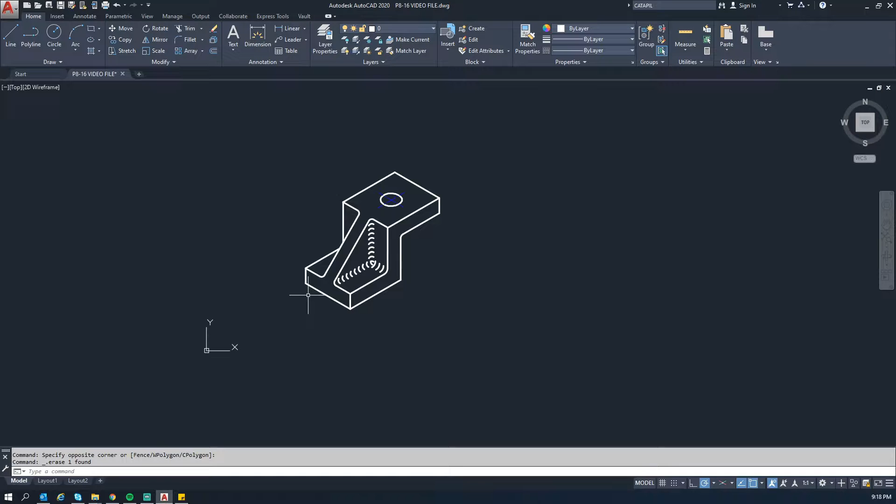So we know the width of this from the book is going to be 44 inches, and we know the height of that is going to be 13. So this shape here is basically what you were going to be seeing here.

Now we need to get the total height of this from the base up to the top. We know that height is going to be 38 plus 13, which is the thickness of this top piece. So we'll go up 38, then up 13, then over the 44, and back down.

The next step is this little ribbed feature here, or what they call a gusset. We know the center line of our part is right here. The width of this is going to be 10 inches, so we know it's going to be 5 inches on either side of this center line.

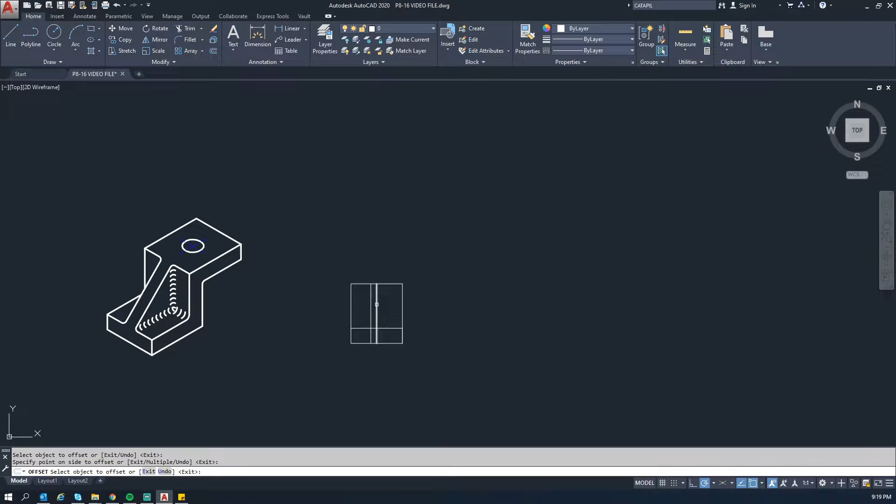So we're going to use the offset command with an offset of 5, then we'll click and click. Same thing to go the other way, and then we'll delete that.

If you notice, these lines down here don't necessarily need to be there, so we can use the trim command, hit spacebar twice, and knock those out, as well as this inside part here. And that's pretty much the overall shape for this thing.

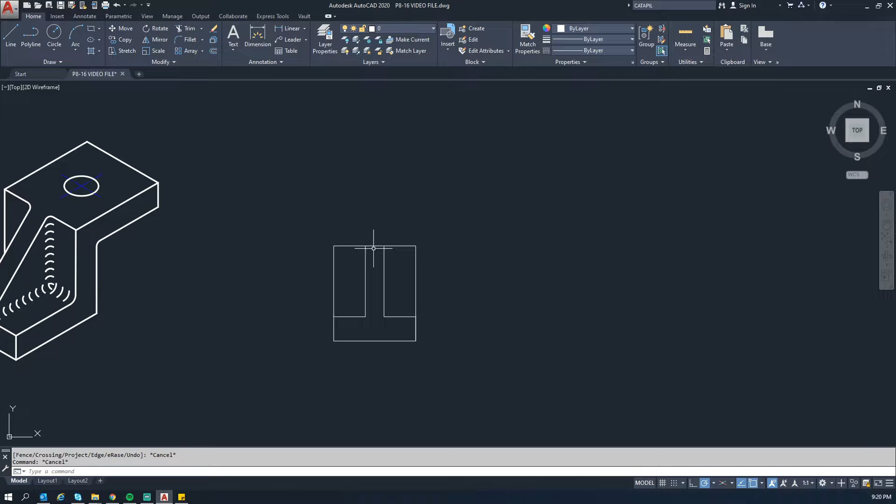What we need to do next is add in these fillets, which are these right here, and those have a radius of 3. So we'll use the fillet command and set the radius to 3.

Let me double check a couple dimensions real quick just to make sure we got it right. Yeah, okay.

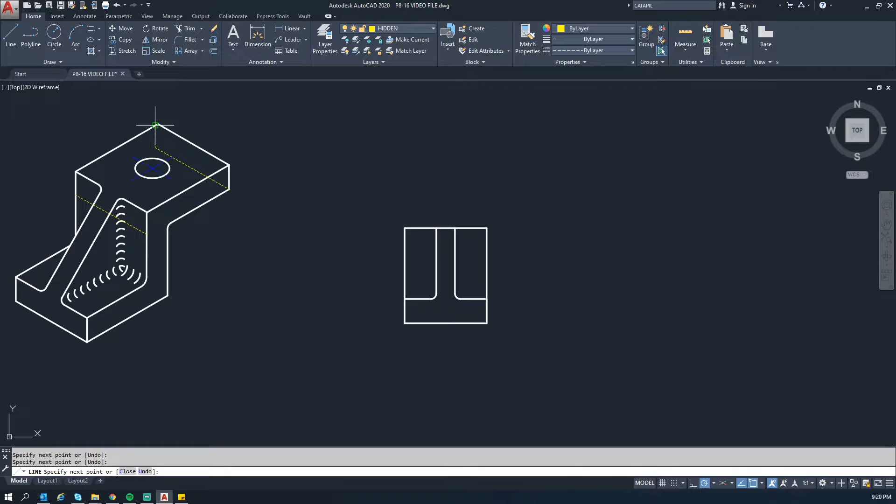So now we need to draw the different hidden lines, center lines, and things like that. We know there's going to be a hidden line for this feature here. You can imagine if you're looking at it from this direction, there's going to be a hidden line across here representing this area right there.

So that's what we need to draw in. We know that the thickness of this from here to here is 13, so we're going to do the same thing over here, go down 13, and draw it all the way across.

I'm going to adjust the line type scale real quick. Can't figure out what the line type... there we go. And then we also need to draw this circle.

We know if we're looking at it from the top, the circle has a diameter of 15 inches. So if we imagine a circle being here, the diameter of 15, then we know that this is where the hidden lines need to be vertically, and it goes through this entire section here, so we'll draw it through the entire section here.

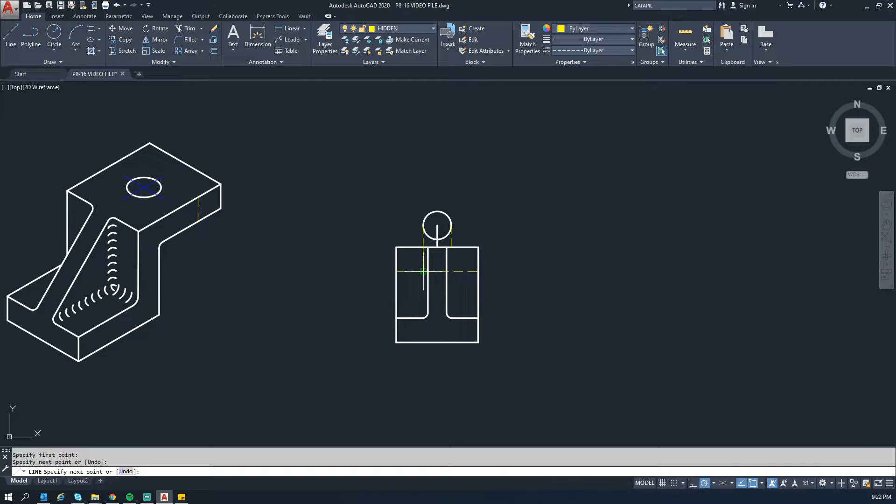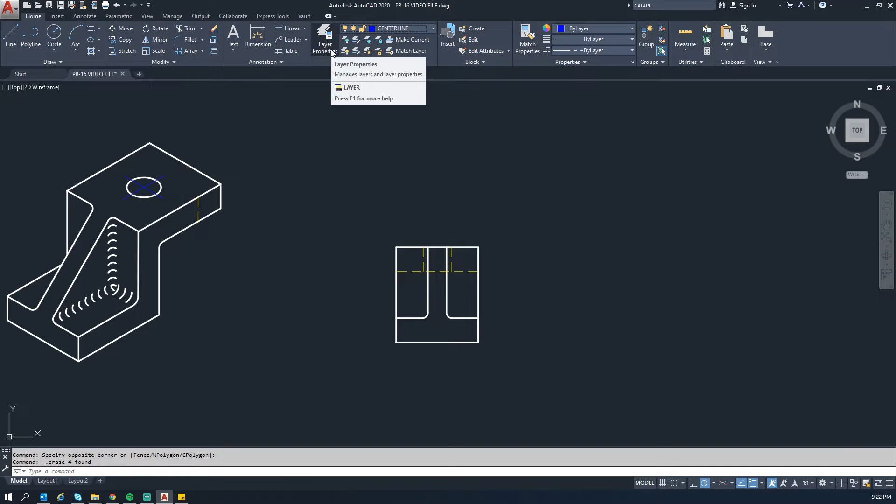Just like that. And we will need to add a center line to that, even though that circle or that hole is hidden, you still need to show the center line for it. So we'll select our layer with the center line on it, use the CL command, center line, and then click each side of the circle.

Make this look a little better. There we go.

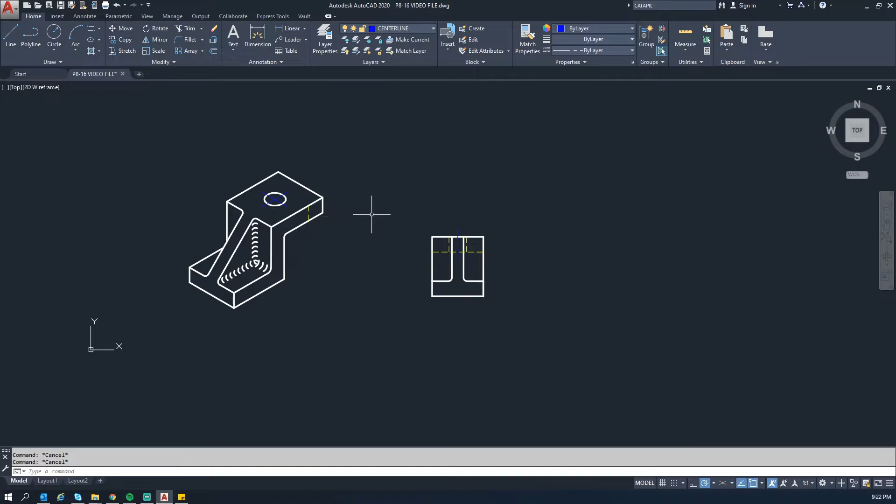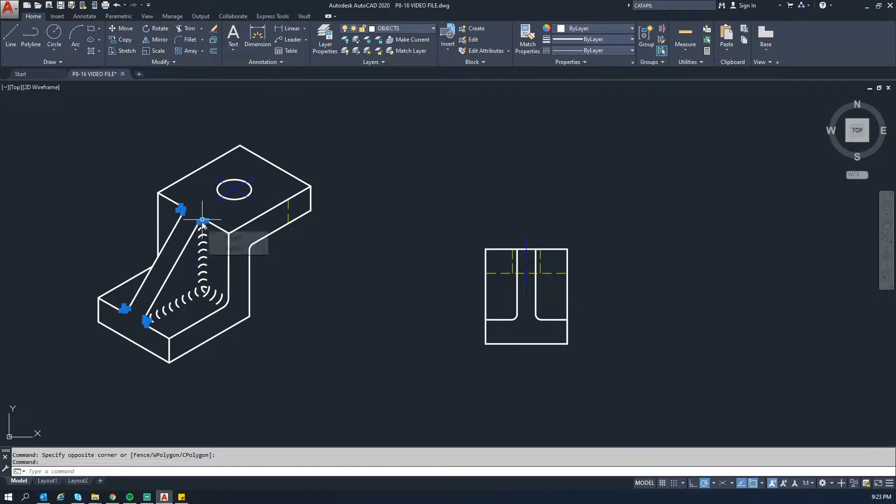Now, looking at it, we need to add these fillets up here with a radius of 3 again. If you notice in the book, when the leader points to this fillet, it has 4xR3, meaning a radius of 3 in 4 different places. Those are the 4 similar radiuses right here. We've already done the 2 on the bottom, so the next step is to do these 2 up on the top.

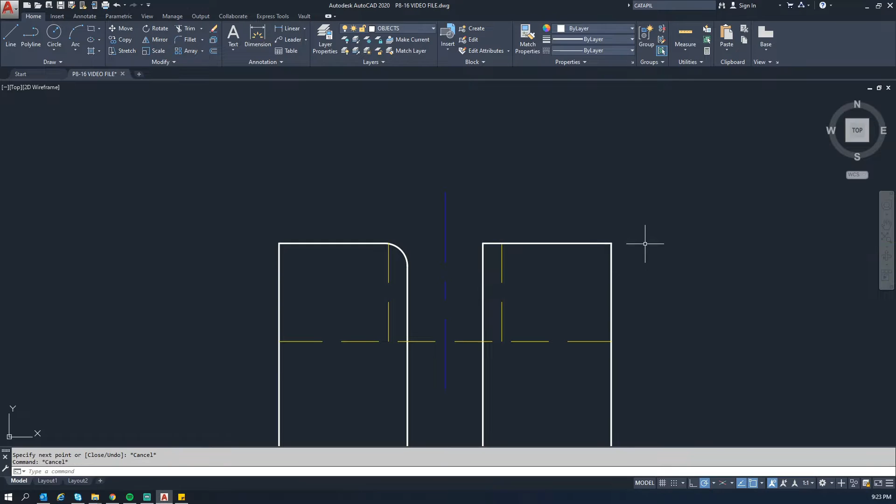We'll activate the fillet command with the radius of 3 and pop that one in. Unfortunately, it does make that line disappear, so you just redraw it, no big deal, and then extend the other one back over to meet it.

Taking another quick look, I think that's all for that view. So the next view we're going to work on is the top view, looking at this shape from the top.

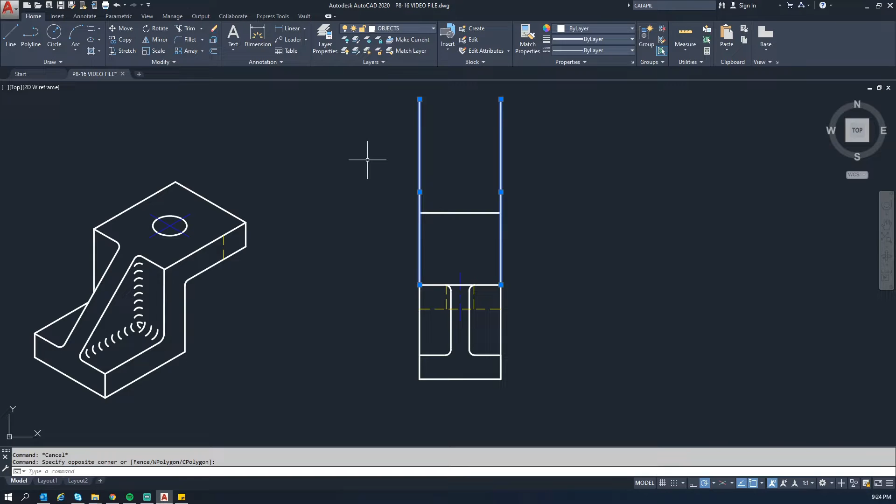We know the width of this entire piece is 44, so we can project off of this bottom if we want. There's a couple different ways you can do it, but there's your width. We know this whole piece from here to here is going to be 88 long, this dimension here. So looking at it from the top, that's how long this needs to be.

The next thing we're going to draw is the square feature up here. We know it is 44 inches across and 51 inches down, so 44 across and 51 down here. I'll go ahead and draw what I like to call my cheater line, 51 inches down, and there, and then there.

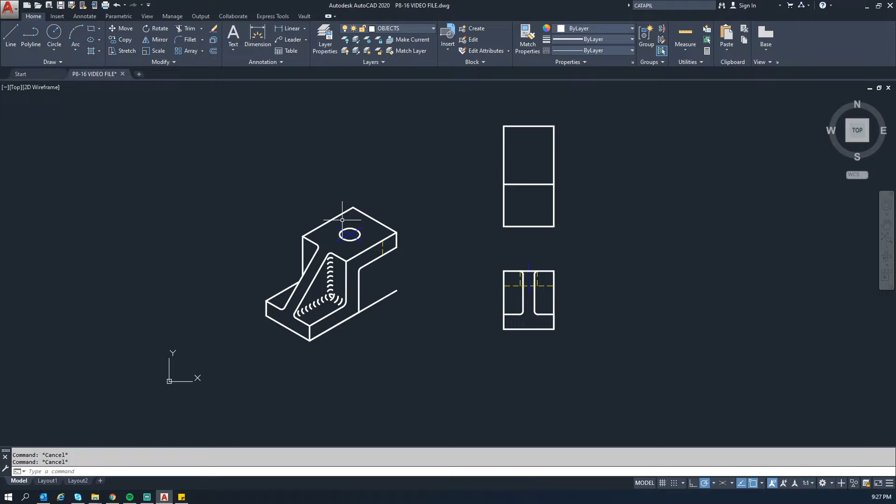I'm noticing that it doesn't look like this isometric view is a true representation as far as its shape in regards to the dimensions given. I've gone back and double checked everything, and these views are correct. This is just not a true representation of what the dimensions are. So when you look at this view from the top, it doesn't really look like it would look like this, but the math is right. Don't get confused by that.

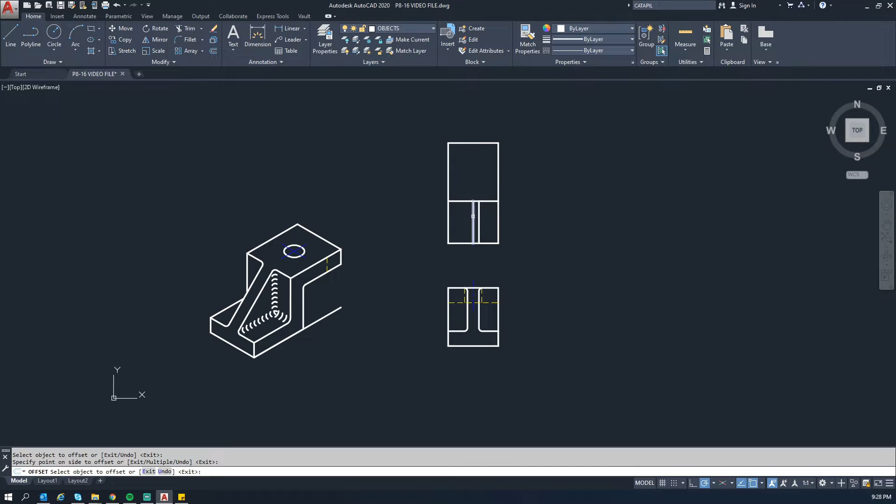Now that we have this drawn, we want to draw in this gusset. We know it goes from here to here, and it's 10 inches wide, so that's 5 inches on either side of this line. We'll do the offset command with a 5-inch offset, click the source and then click to the right, click the source again, click to the left, and delete the original line.

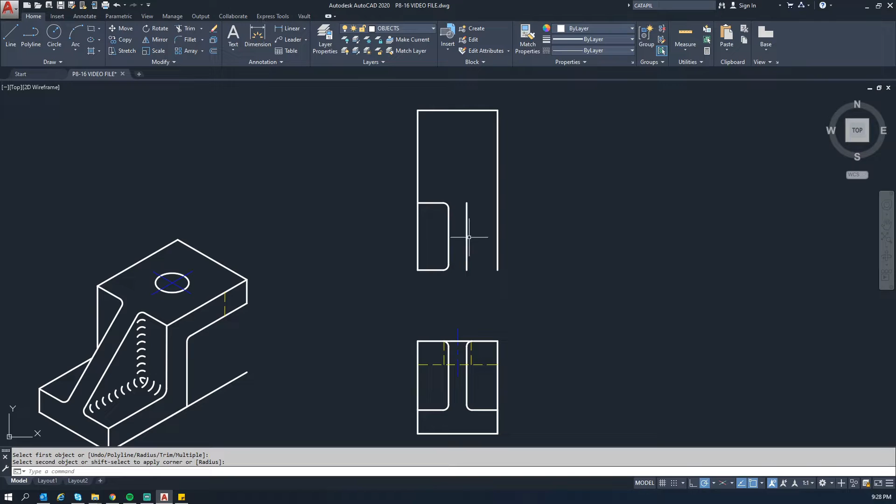We know the radius of these 4 fillets are going to be 3, so we'll reactivate the fillet command, tell it a radius of 3. It's going to do that weird thing where it erases the lines, but unfortunately that's just part of it - pain in the butt. Then we'll just redraw the line.

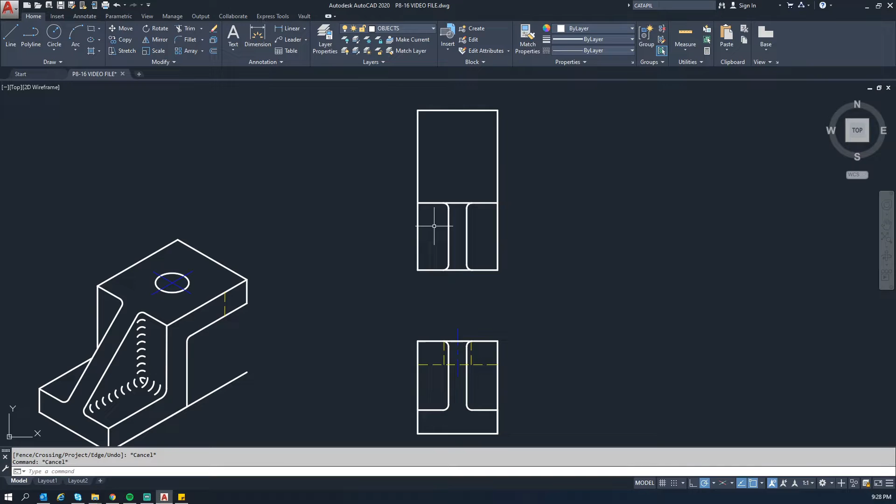I think all that's left now is drawing the circle in the middle. We know it's 22 inches down and 22 inches across, so it looks like it's going to be in the middle of that part. All we need to do is draw a line 22 inches down to mark the center point for the circle. Activate the circle command and click for the center point, then do a diameter measurement of 15. Once that's there, you can delete that line.

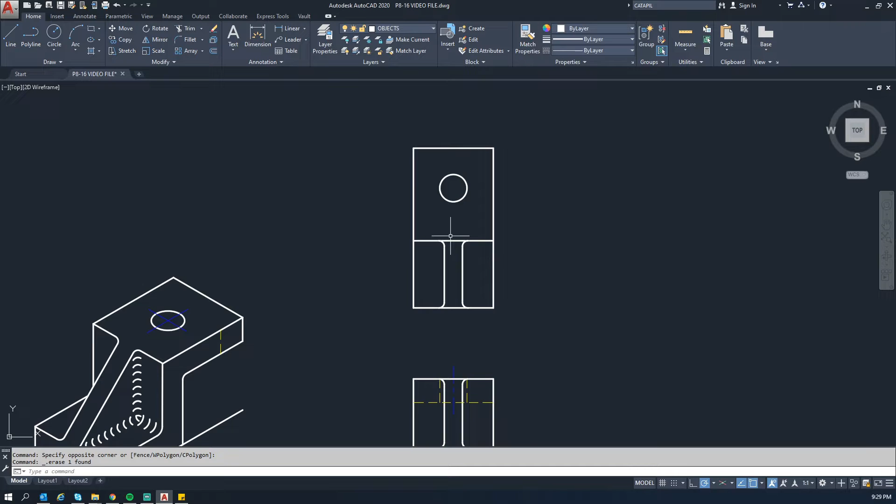It doesn't look like - yes, there will be a hidden line. We can see this line from looking from the top, but there's also one under here that we don't see, so that needs to be displayed using a hidden line. We know the thickness of this part here, here, and even down here is 13 inches - that thickness is consistent all the way through. So we can come up here, draw a line 13 inches up, and we know that's where it's going to go across there.

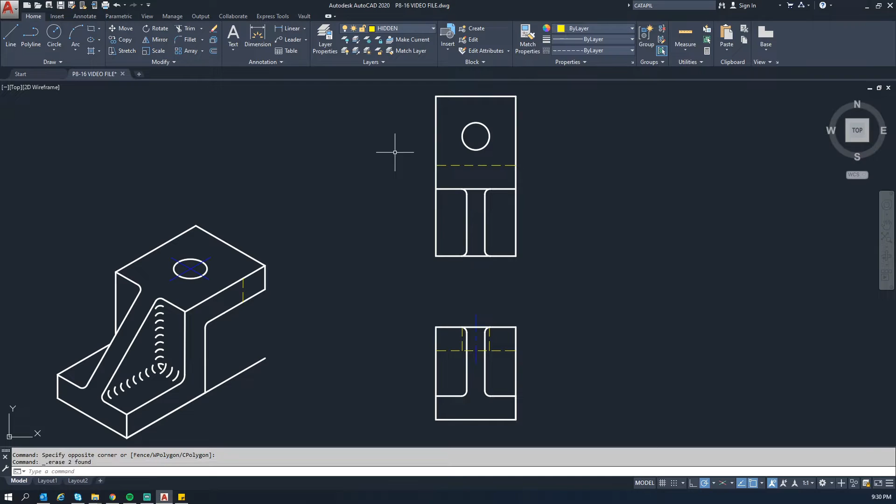And then from there, it looks like all we need to do is add the center line. So we'll activate our center line layer, hit CM for center mark, and click in the center. And that view is done.

So for the next view, we're going to be doing the right side view, looking at it from this direction. Just take a moment and imagine what you think it would look like before you draw it, especially now that we've already done two views together. If you want, pause the video and try to visualize what this would look like.

We're going to start off with just a couple quick reference lines that we'll delete later. We know that's how tall the entire part's going to be, it can't be any taller than this. And we know that this height here, from here to here, is 13. We'll try to pick about the same distance and go back and adjust that when we're done, because you want these distances to be the same between here and here and here and here. So we'll go up 13.

And we know the total length of the part is 88 inches long. So we can go ahead and draw this 88 inches, but keep in mind, this is 88 inches right here, but there's a section right here that's going to be missing, so just keep a mental note of that.

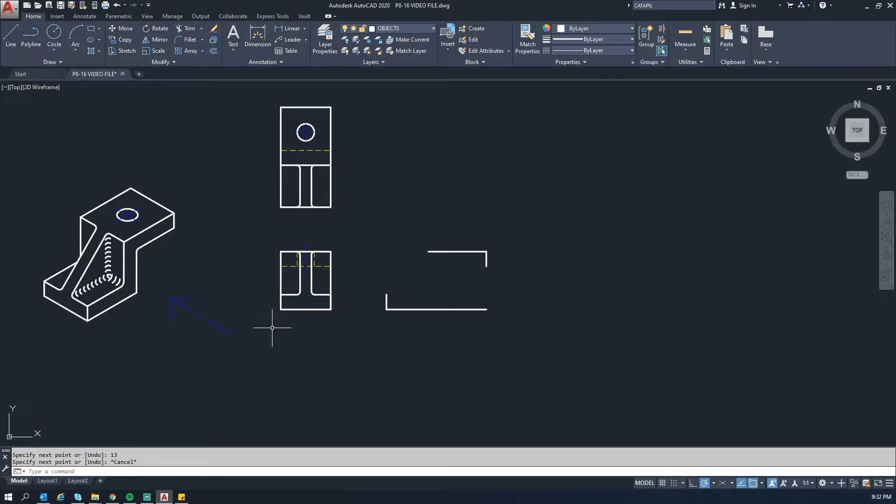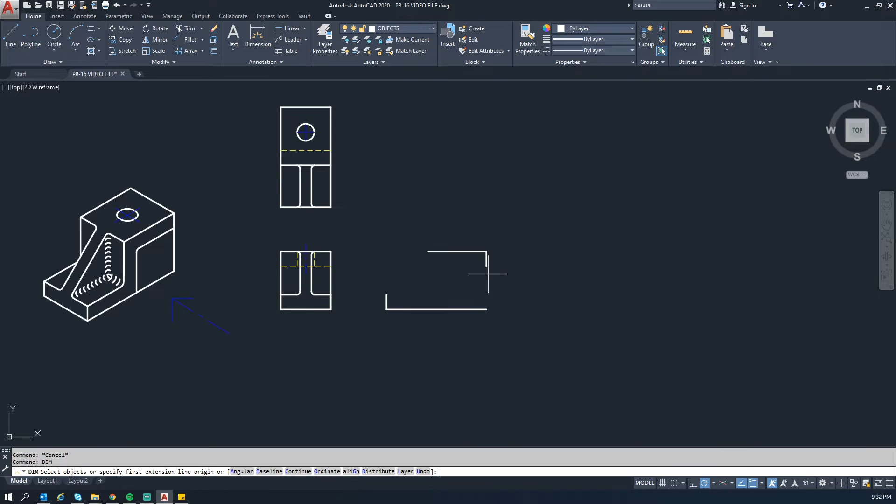And now it's just a matter of connecting what I call the zigzag. So we know this height, from here, this height right here in the book is 38 inches. If you use the dim tool, you can always double check. See right there, it's 38 inches, which is exactly what the book says. So we know we're doing all this right so far.

The next portion is, I'm going to draw a couple cheater lines again, going from here to here. But if you notice, that makes the intersection, and that's actually the shape of the part we want—that's this line and this line. So we can just use those. We can use the trim command, hit space twice, and trim that up.

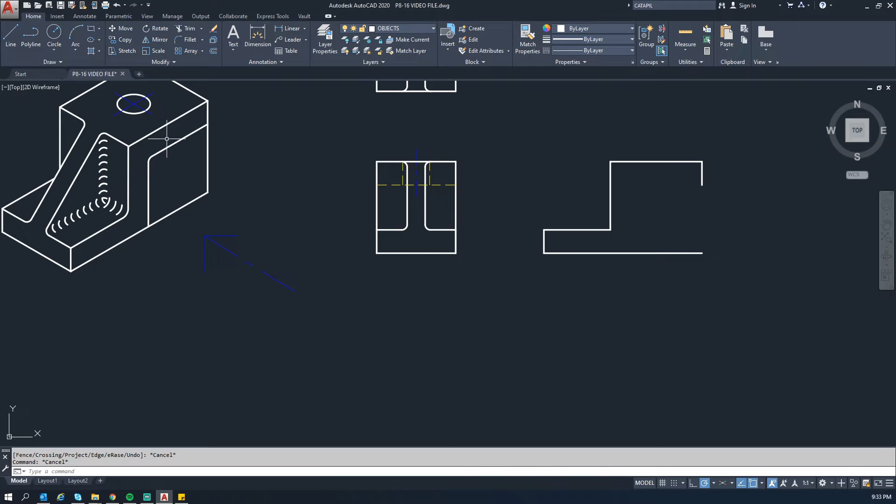So now we need to finish drawing this profile right here, which is going to be this right here. Remember, the thickness is consistent all the way through at 13. So we can draw a cheater line across here of 13, just draw it straight down, and then we know that's going to go to there. If you notice, these intersecting points here finish off the rest of the profile for you, and then that's your shape.

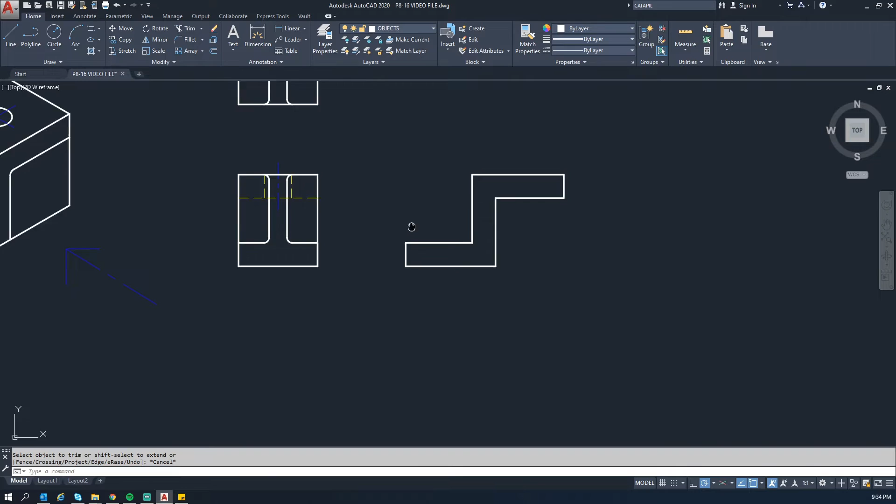So the only thing left to draw now is this gusset, which is actually really easy, because if you notice it goes from this point here to that point there. So that's it right there.

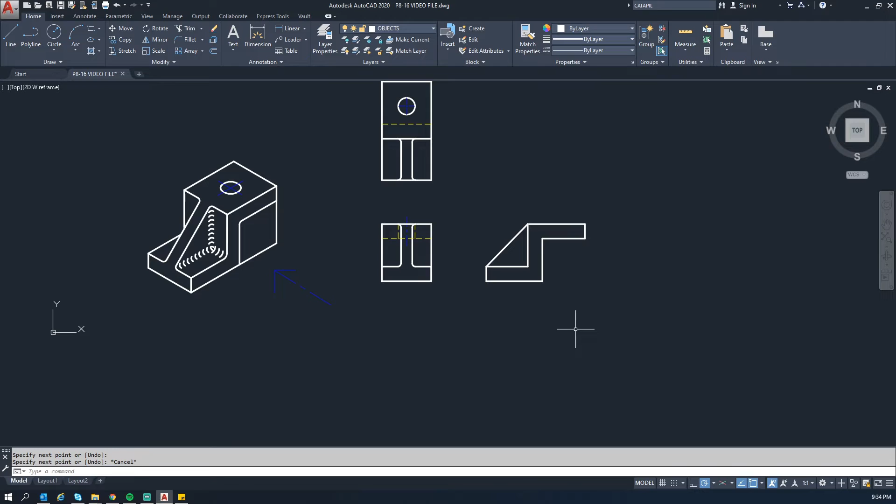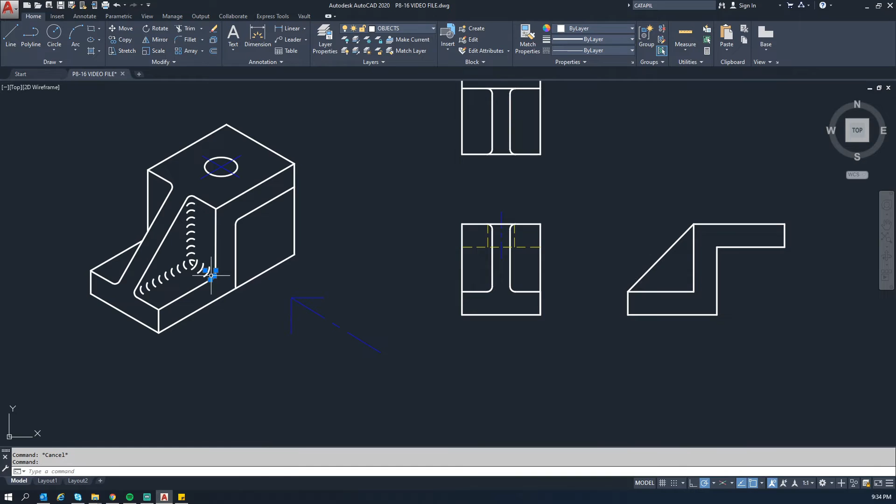With this view, you're not able to see these fillets that are here. You're looking at it from the right side, and because of the way the geometry is, when you look at the fillets from this side, there's no way to draw these fillets in. But the ones that are there are going to be this one and this one. And if you look at the book, it identifies this one right here as a fillet with a radius of—correction—that one is 4 and this one is 6. So we're going to use the fillet command with a radius of 4 and do that one, and then do another fillet with a radius of 6 and do that one.

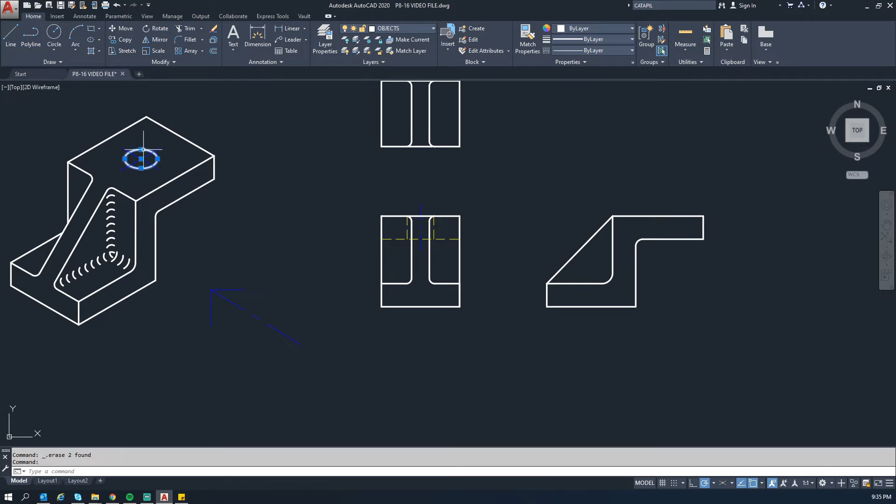That's all of the visible lines that are there. The only thing left is going to be the hidden line for the only feature that's not visible, which is this circle.

So again, in the book, we know that circle is 22 inches from that direction and 22 inches from that direction. So if you imagine this is the right side view, we're looking at the top view from the right. So we know it's 22 inches from this back edge. Well, this is our back edge right here.

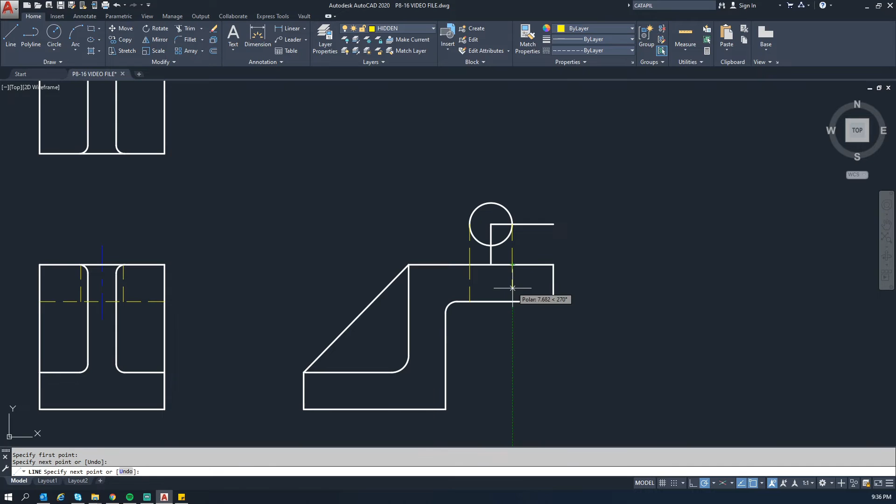So we can draw a cheater line, 22 inches and down, and that's going to be the center point of where the circle is. So we can do the circle, the dimensions are 15, so we'll do a diameter of 15. Then we'll get our hidden line layer. And boom, that's the circle. Then we'll select our center line layer.

Then we'll use the CL command for center line, and then we'll click each side of the circle. We'll extend these out just a little bit to make them look better.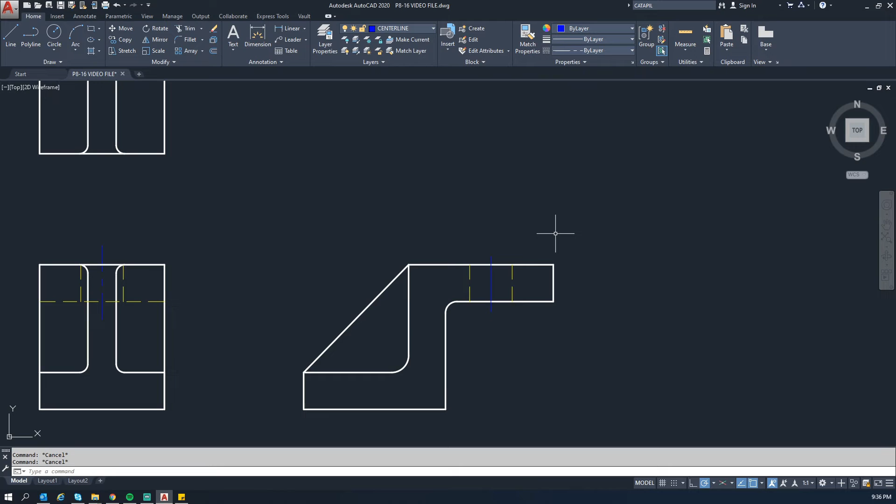But it'll probably be a little different for you guys, so you just need to play with the line scale, the line type scale, and things like that, and you can get it looking good. So let's see if we can get this one cleaned up a little bit.

We use the properties command after we highlight it. You can see here, these are all your extensions for your extension lines beyond the circle. So right now they're set at 0.12. So let's go to 0.3.

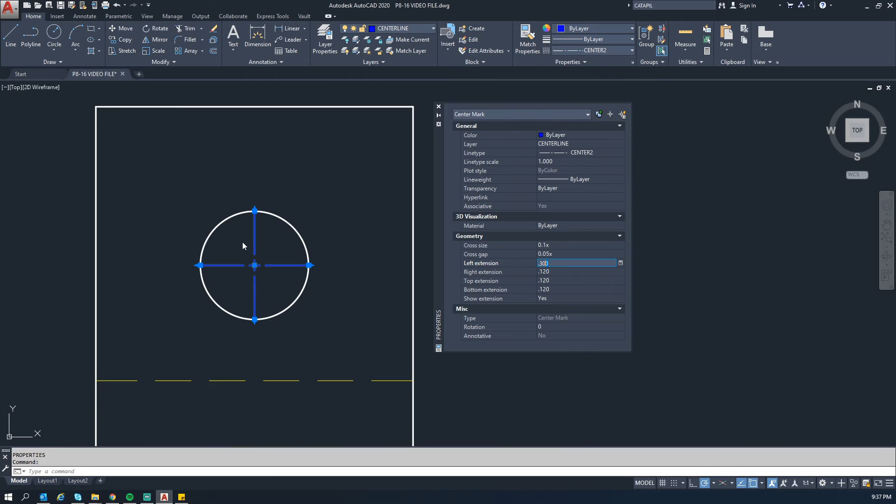Didn't look long enough. We're looking at this one over here. Let's do 0.5. Still doesn't look long enough. There we go, 1 inch looks good. So we'll go ahead and set all of them to 1 inch. Yeah, that looks better.

So now we'll just take a step back and look and make sure we have everything. So I think we're done.

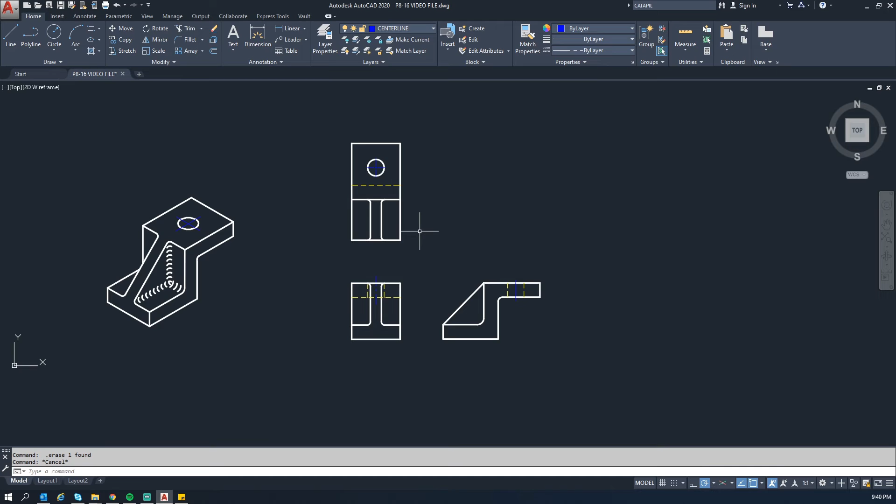Show you guys a quick trick. It's a good way to double check to make sure your orthographic projections are truly projecting, and all your dimensions and features all line up.

So you can see here the spacing I have between each object is going to be the same. So if you set this to the same, you can see they're 39 inches apart—39 inches here and 39 inches here. If you draw a line from the top right point here at 45 degrees out like this, change this up so it's not so thick.

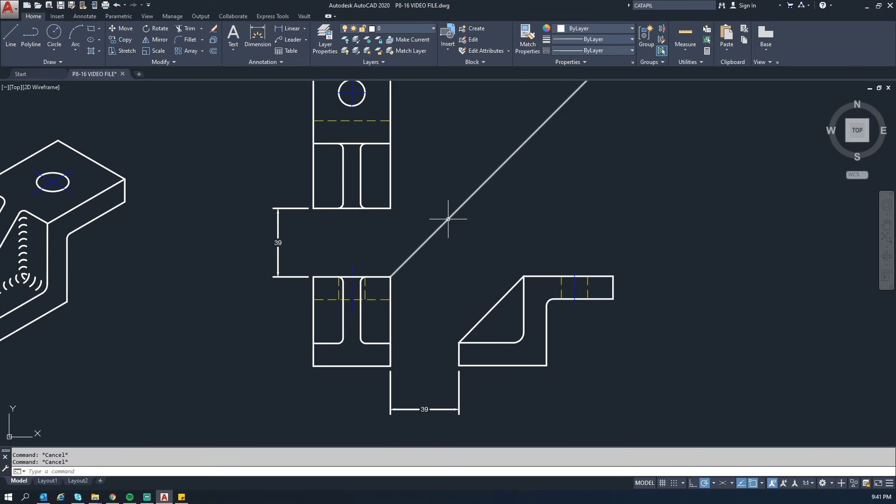One way to double check to make sure all your features line up is you can go draw a line from here, and wherever that point intersects, you can draw a line straight down and it'll connect. So you have the front edge of the part here lining up with the front edge of the part down there.

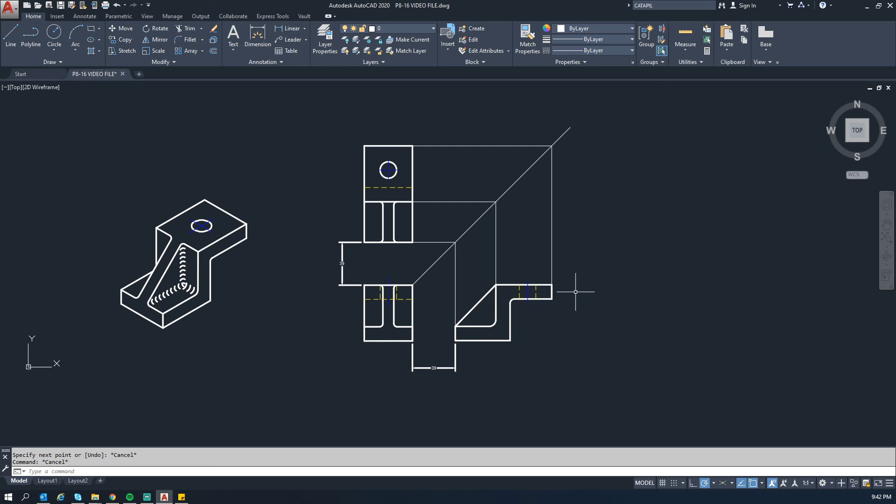Same thing with the top. You can come across like this and go straight down and it lines up. Let's see if this part here lines up. Yep. And just in case, let's check this line here. This is also a good way to really visualize what's going on. Yep, you can see that line is hidden there, but it's representing that line there.

Let's check the circle. Circle lines up. So you can see this is done correctly. You can also use this method.

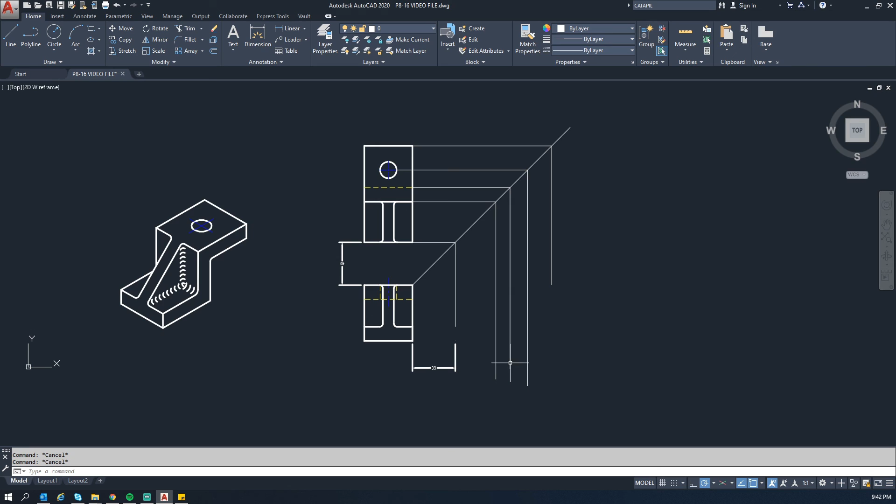Say this wasn't even here, say you haven't drawn that yet, you drew these two views. You can do the same method and draw these lines. You can extend them down real far, and it gives you an idea of where all the different feature locations are going to be. So just another trick you can have up your sleeve, but it's definitely good for double checking your work when you're done to make sure everything lines up and is a true orthographic representation of the isometric model that you're drawing.